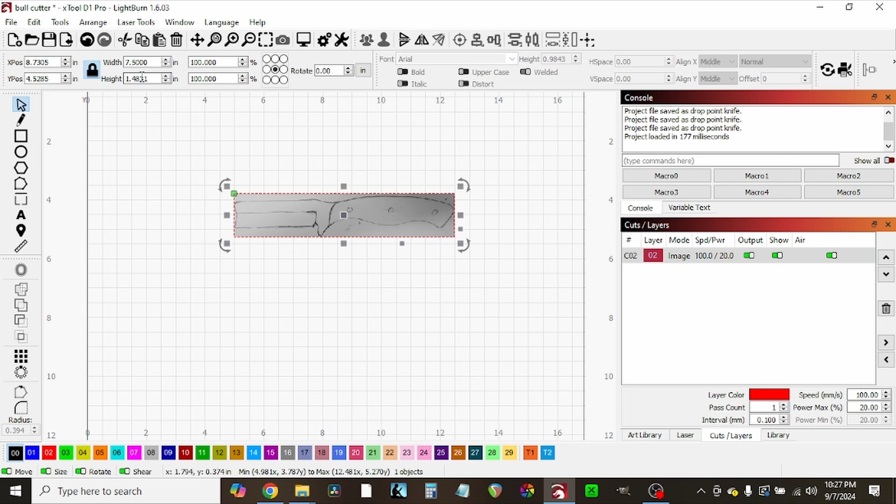Another tip, when you're cropping, crop it as close to the design as you can. Then you can set your size and get it close, and we'll get it perfect after we get the design outlined.

Now, in order to outline it, you use the pencil tool. Zoom in.

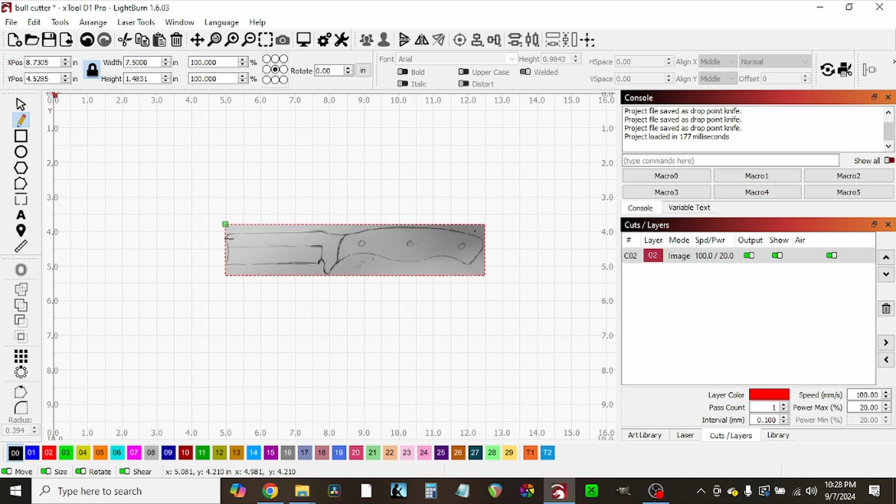I've got it set to red so I can see it better. Now you can see I got it cropped pretty close.

I'm going to start right here on this curve. I thought I had it set to red. Alright, now it's set to red.

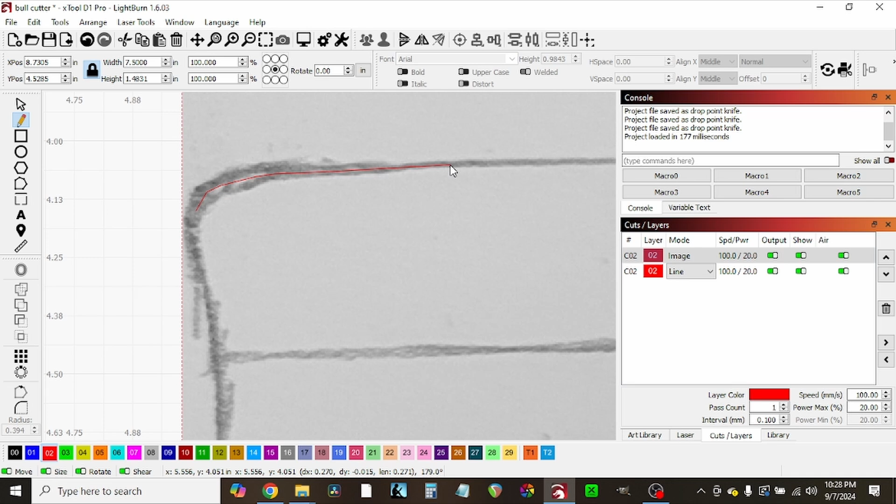I'm going to just make short lines around this curve, and as the lines get straighter on the design, we can make longer lines.

Also, if you're having trouble with it snapping to the grid, you can go to settings and turn snap to grid off. That's what I did.

So you can get precise on your design, is what I'm trying to say.

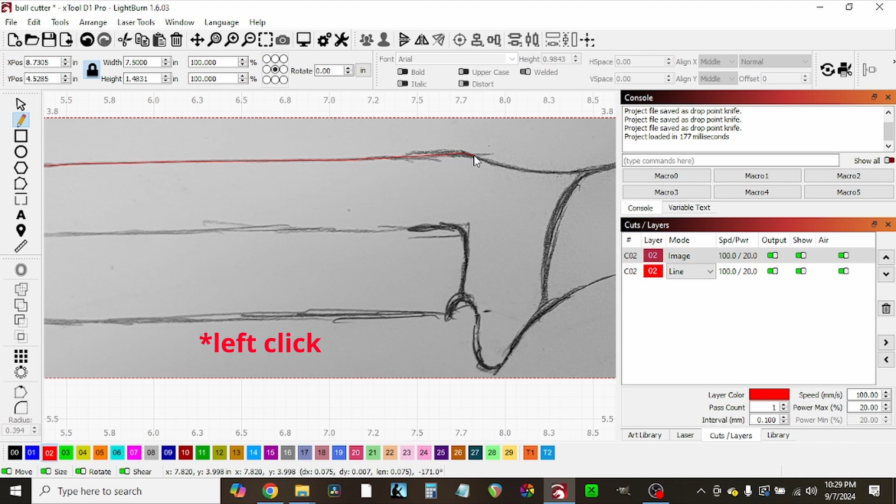So we come to a curve, and we're going to make short lines. All I'm doing is left clicking, then moving my mouse and going a little further. Now if you get a little off, it's okay.

I'm using the wheel button to move my picture around. Just keep trucking along, and this doesn't take very long to do.

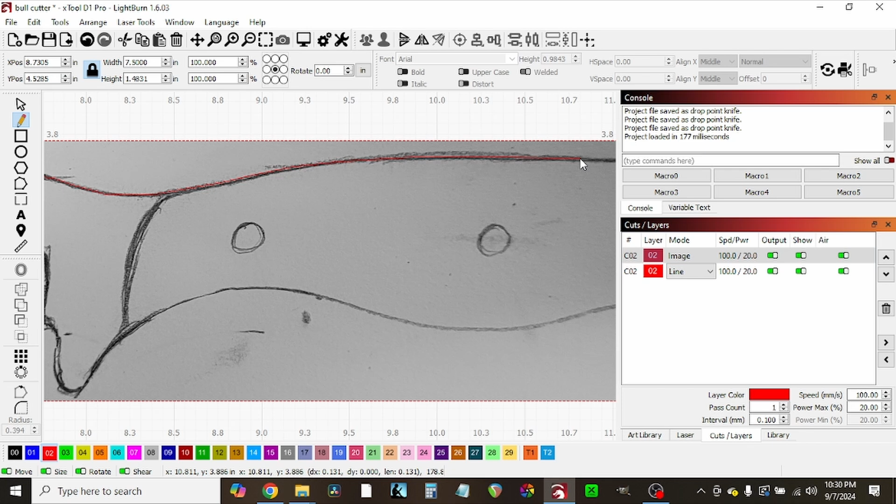There's a few curves in this one. Getting closer, too close.

Now this is not going to be... screwed up. Almost. I used the wrong button trying to move the picture.

Now just keep trucking along to get all the way around it. I may speed this up, I don't know. Maybe not, because it doesn't take very long.

Now, if you goof up and get one like this, we can fix that later. I'll show you how to do that when we get done with this trace.

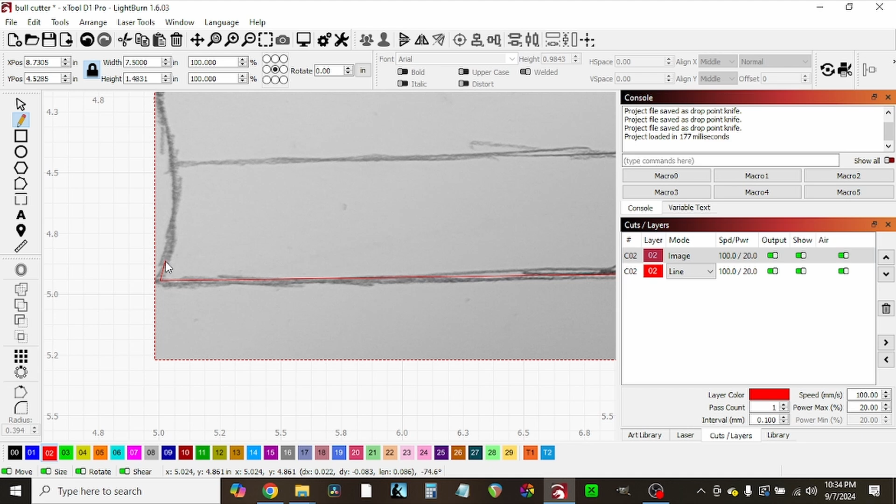It'll be straight all the way over to here, and this is going to have a little bit of roundness to it.

We'll fine tune that on the sander as well, because it's hard to get a curve on this line. I mean, it can be done, but...

Almost to the finish line. This part, anyway.

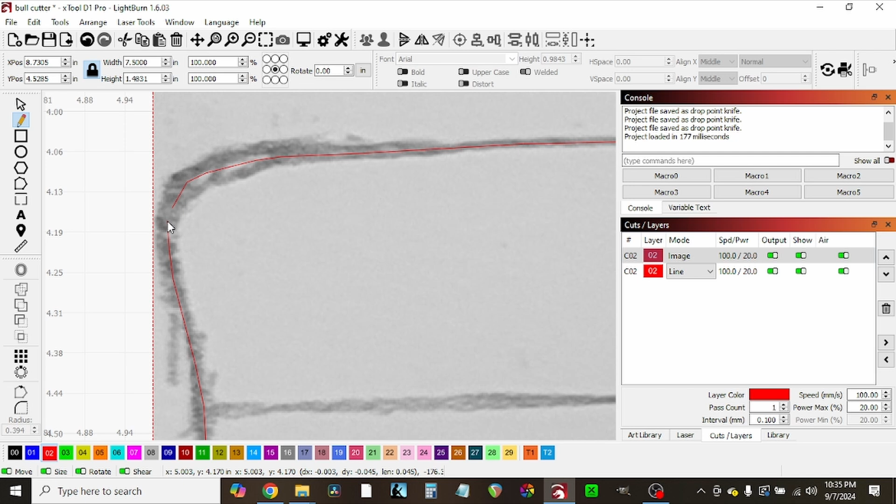Now when you get to your line, zoom in real close and connect these two lines. There.

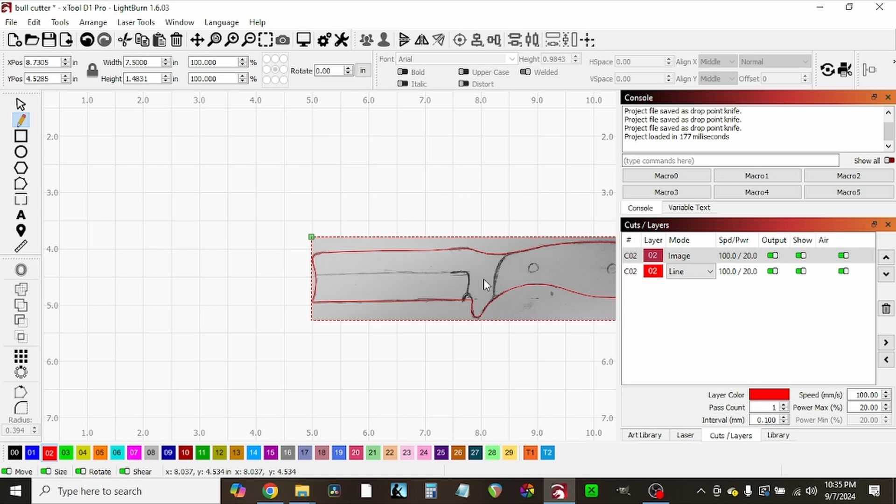So now we've got a trace all the way around it. And where was that oopsie spot? Right there. So to fix that oopsie spot, go up here to edit nodes and click on that.

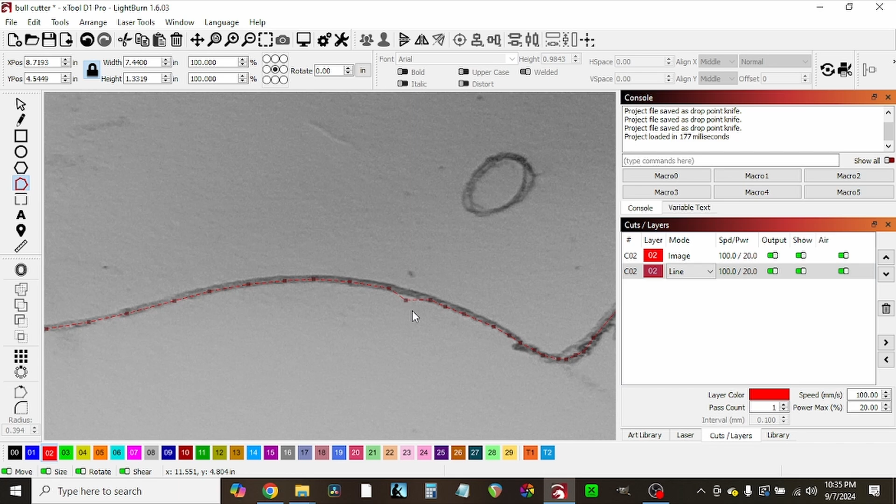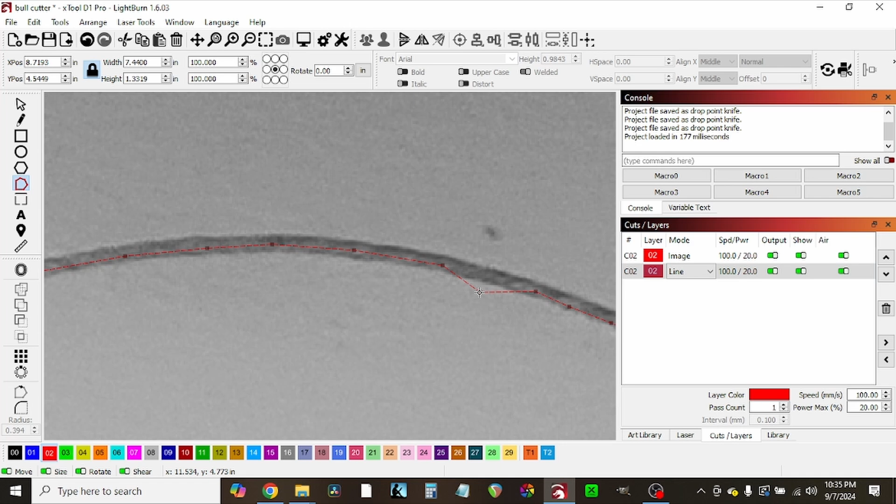Click on the line, and here's all your nodes—there's a bunch of them. So we can fine tune this and fix that little spot right there by dragging it back up into place.

There, it's fixed. Now if there's any other places, like maybe that one—not bad—bring this in just a little bit.

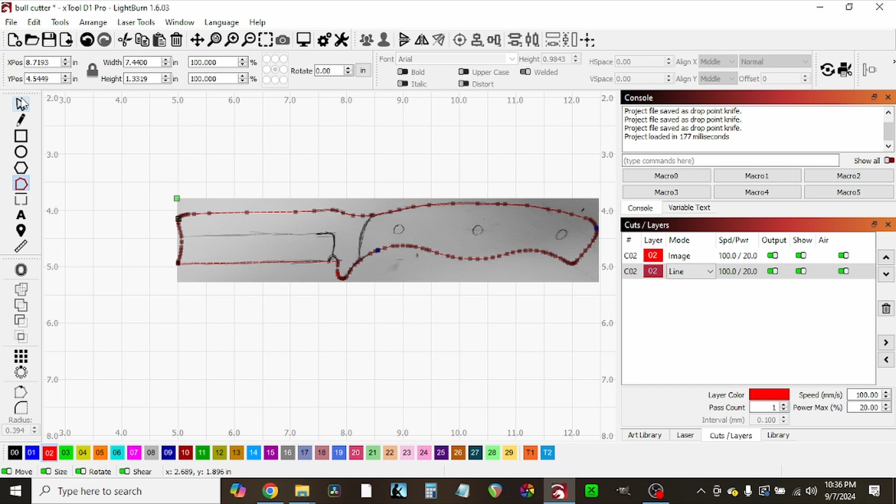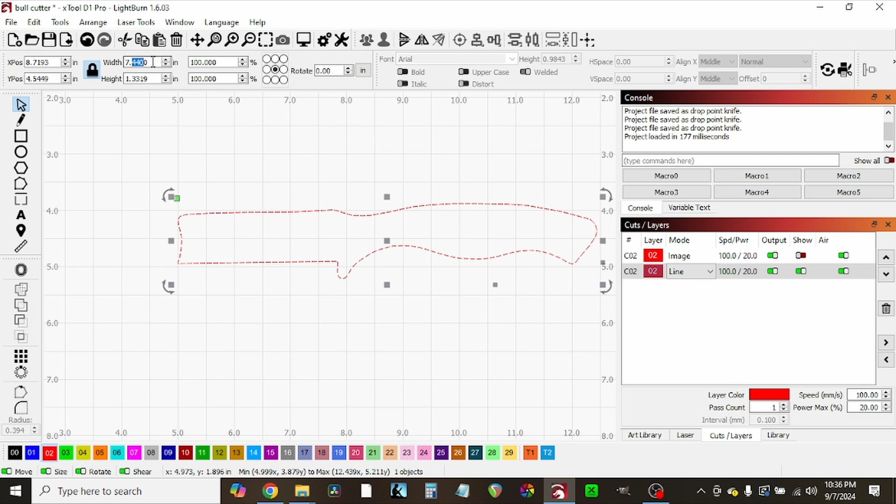That looks good. So I'm going to go to my selector tool and select. First I'm going to turn this off, and this is selected. It's 7.44, but we started out with 7.5 on the picture. I want it 7.5, so I'm just going to highlight that and put a 5 there. Now we have the right size.

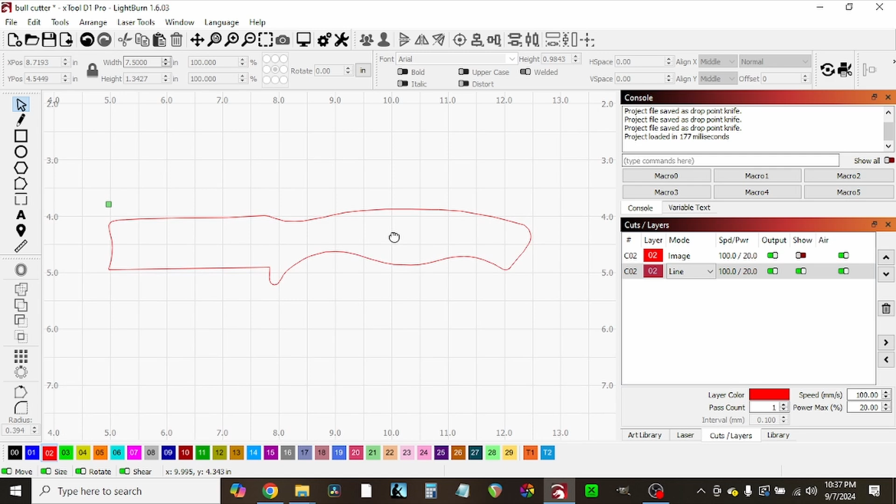Next is the pin holes for your pin stock. Or no, probably ought to do this line right here, edge of the scale.

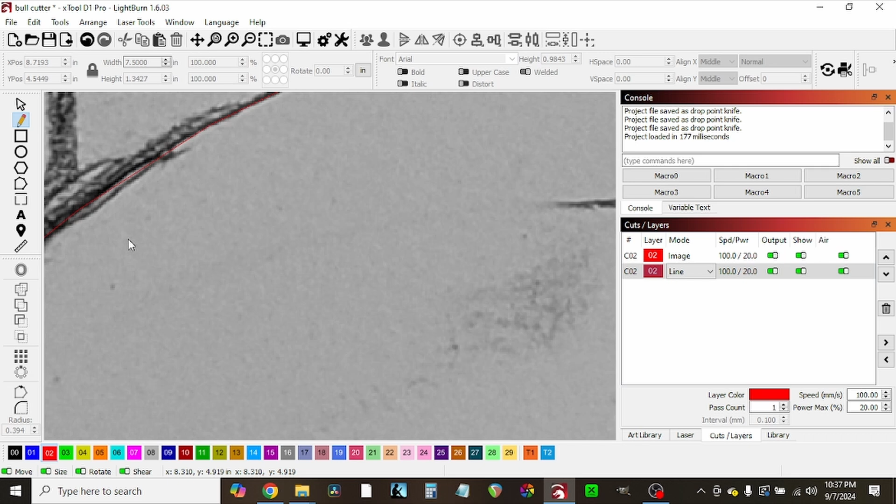So we'll go back up to our pencil, zoom in. I'm going to do this in blue, because I don't want to cut this, I just want a line right there. We'll follow this up. Again, it doesn't have to be perfect, it's just a guide.

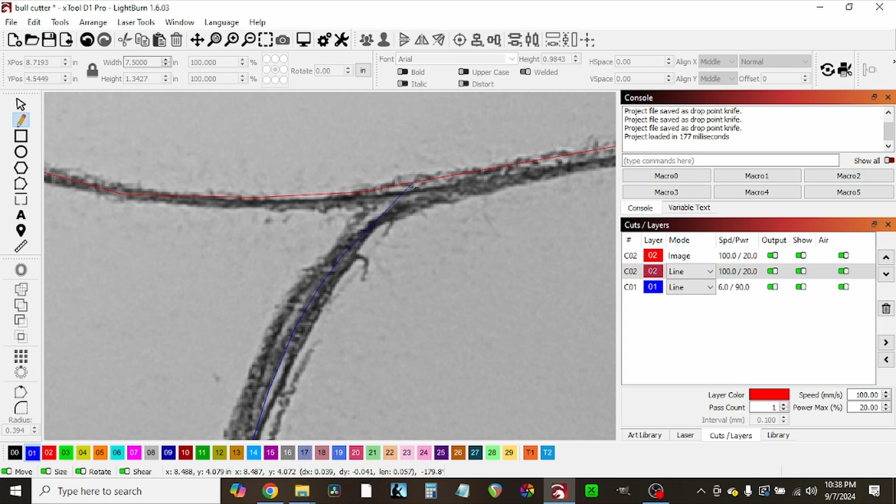Now, up here, get as close to that line as you can, then right click to stop. So what we've got now—I'm starting to get into a hurry because it's night, it's late, and I'm tired.

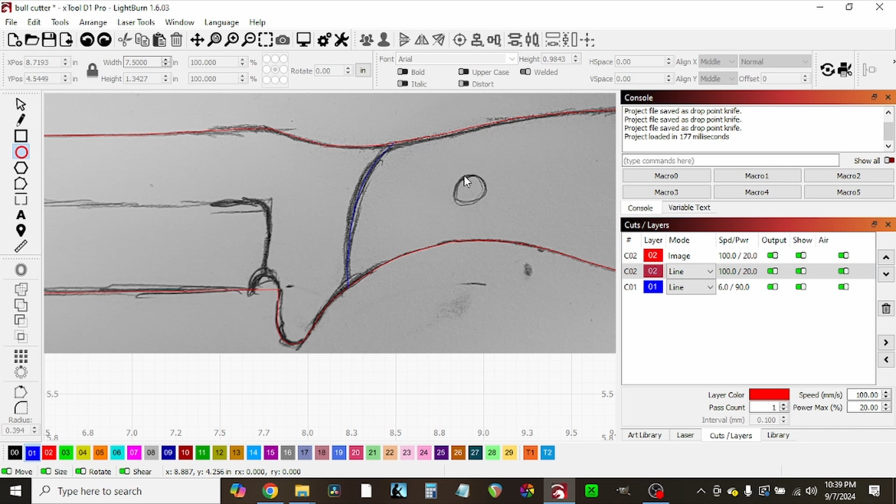So next is the holes for the pins. I want to put them on here because it's easier to mark them—I don't have to mark them separately. We'll hold down shift, then left click and drag, and that'll give me a perfect circle.

That's pretty close to the size I want. I'm going to come up here, make sure circle is selected. Come up here, and I want to put the size of my pin stock. I'm using 3/16, so that's 0.187.

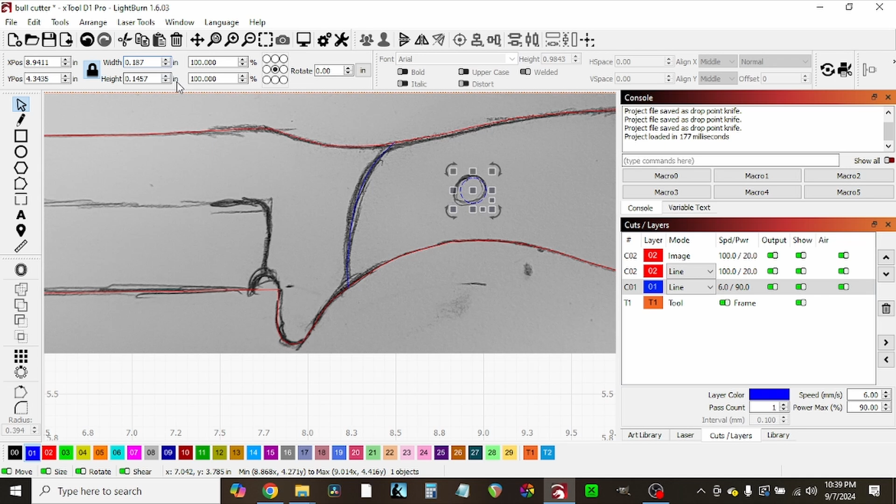This is locked, so this will change here. What the hell happened? 187. Okay.

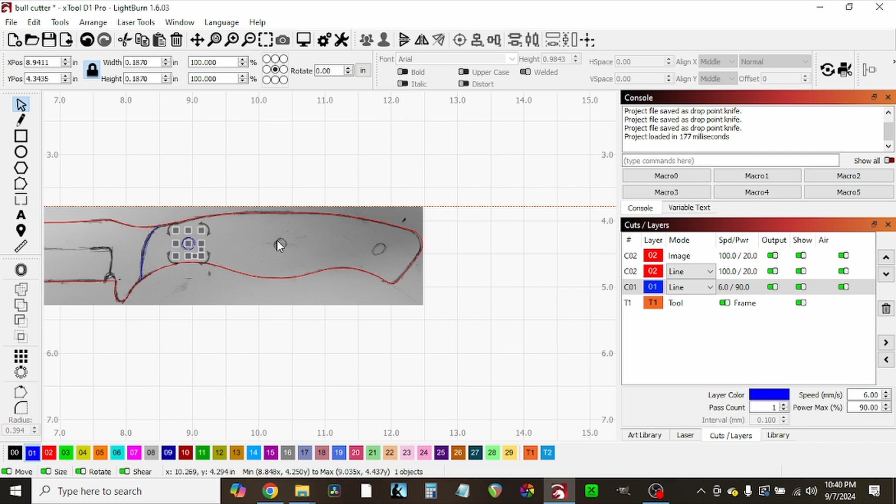Now the first one's marked. We're going to right click, copy, over here where we want it, paste, then another paste over here. And now we've approximately got our holes.

We'll turn that background picture off. Now I'm going to place this where it looks good—right there. This needs to come over—right there.

Now I'm going to measure from this hole to this hole—1.3198. 1.2.

So let me come over here. I'll turn this off—sucks, I have to turn it off to move this over just a fraction of an inch.

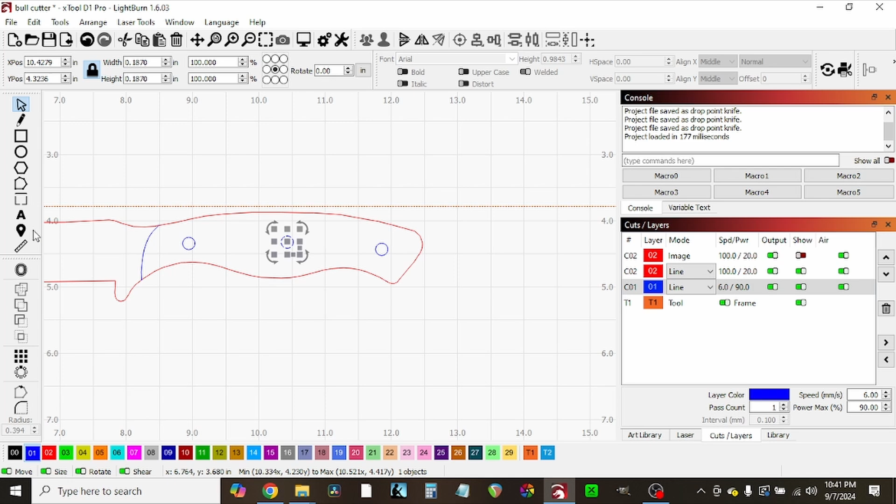Now I'll go back to my measuring tool. Measure—1.3, 1.24—and move it over a little bit more. No, I'm not going to get it perfect. I'm going to get close. Try that.

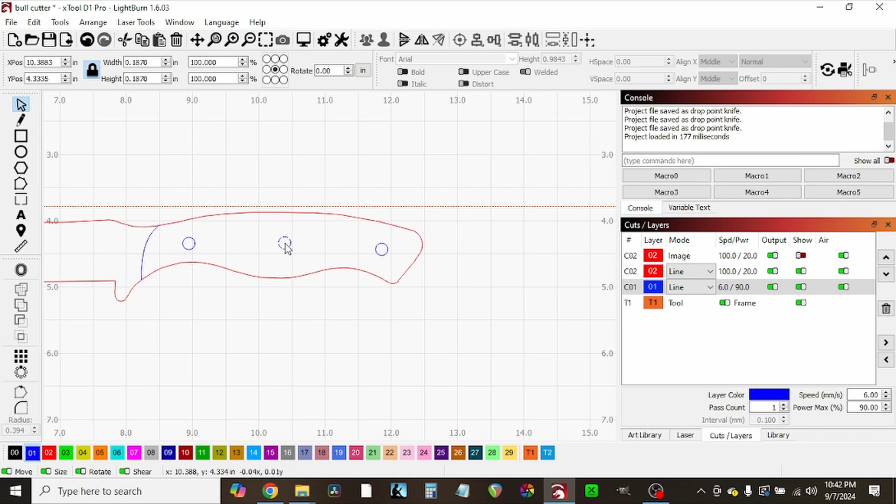This part's a little finicky, but well worth doing. I think I moved it too far—it's 1.26. 1.28, okay, that's close enough. And it looks like it's pretty close to centered, up and down, left and right.

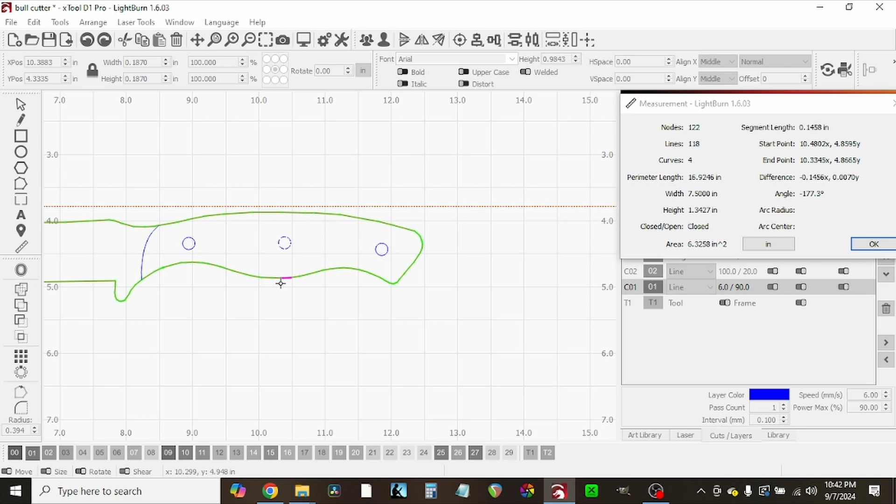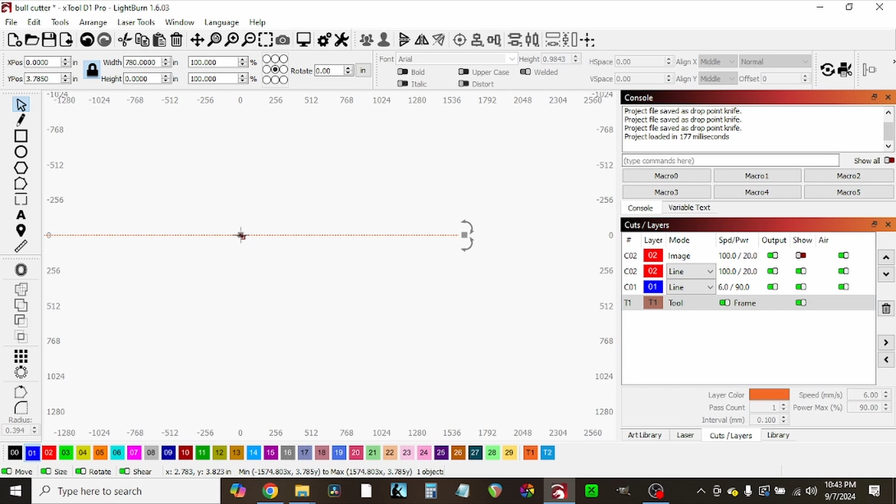Now the next thing I'm going to do—close that, unselect that. Where's that line? What the hell is that line? I didn't put that line there. Huh. No idea—get rid of it though. I don't need it, no idea how it got there.

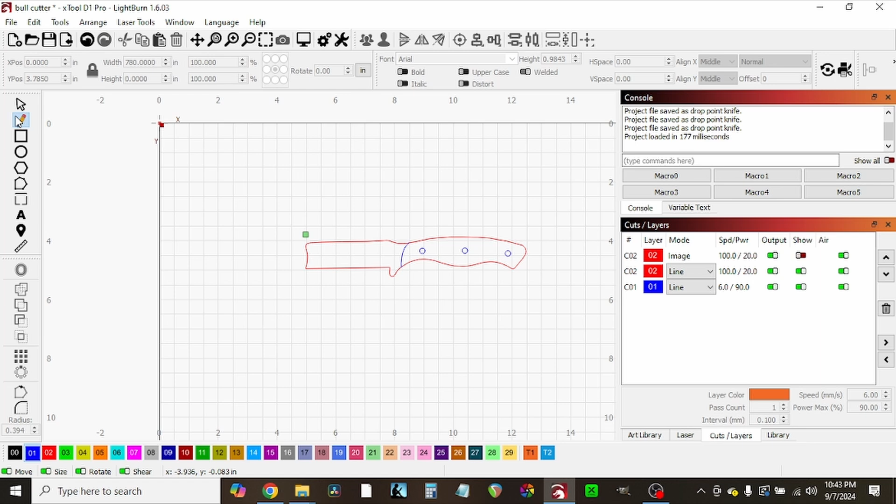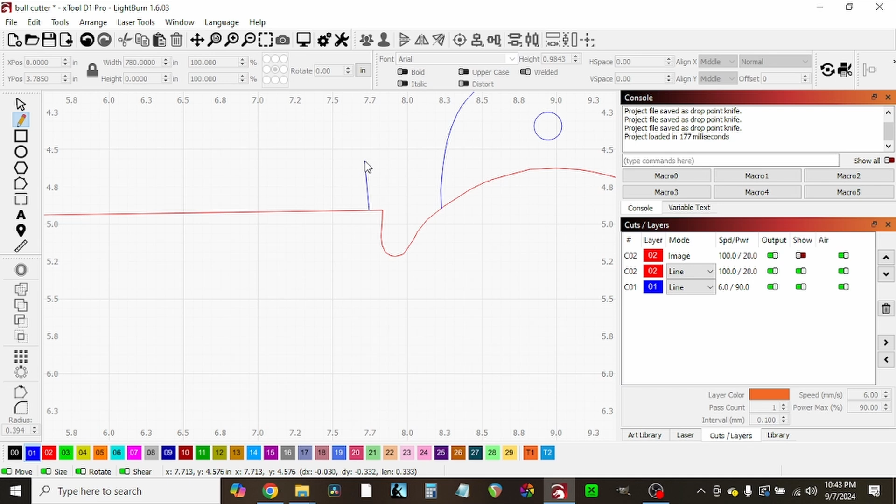Okay, the next thing I'm going to do is take my pencil tool. I'm going to come over here, and my sharpening tool will be centered probably about right there. Cancel that—right about there. Zoom out. Probably bring my grind line up to about right there.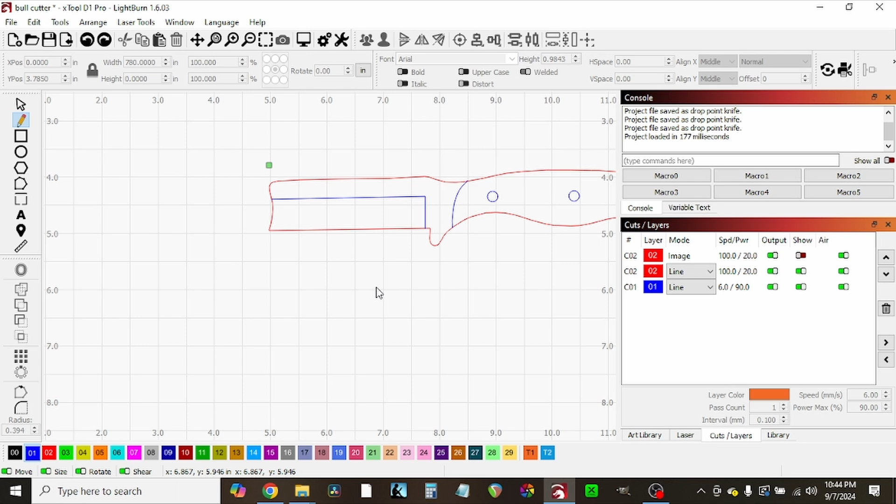So that's about what it's going to look like. Now let's see, just looked it over, make sure I'm done. And we can show this image.

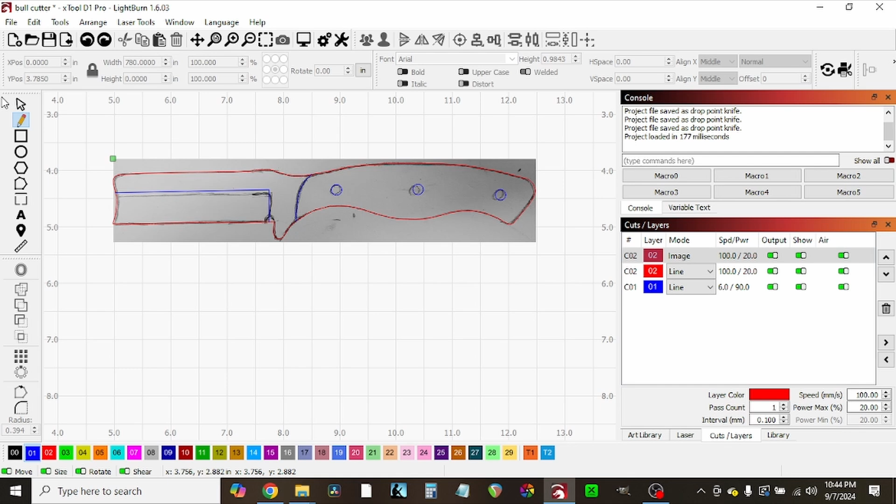Click on it. Cancel. Now we click on it and delete—don't need it anymore.

Now this needs to be set for 1/8 inch. I've got an xTool 10-watt laser, and the speed is right. I need to turn up the heat on this one. No, that's not right—that needs to be 6. This needs to be 90. I think I'm going to turn that to 5, because my lens is pretty dirty on it. One pass. Okay.

Now on this one—come on, select it, select it. This one I want 100 speed. And I want about 70. Oops. One pass.

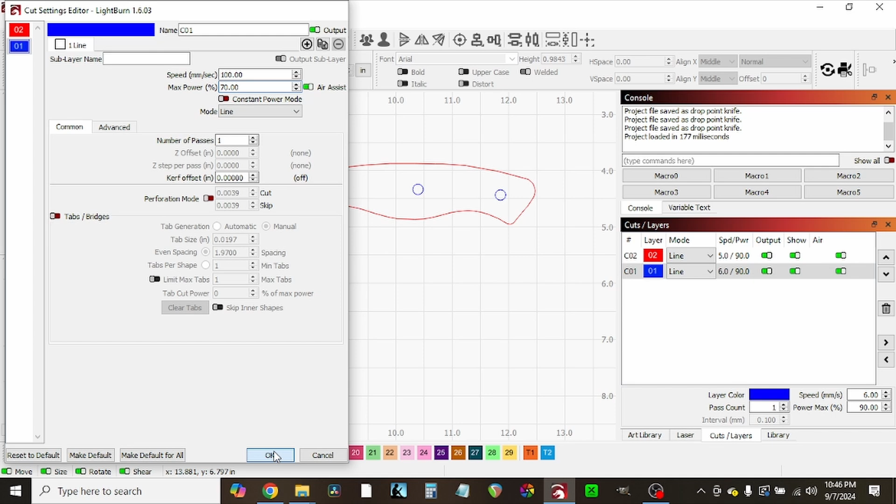And I just noticed these are blue—I don't want them blue. So I'm going to hold down Control, select, and select all three of them, and put them on this red because I want them cut out. The blue lines I don't want cut—they're just marks, guidelines.

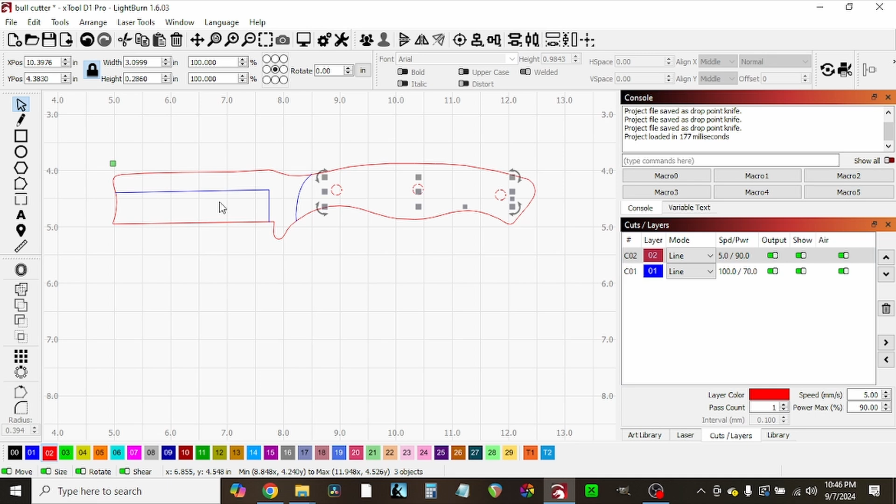And now we are ready to burn. So I think I'm going to finish this up in the morning. I'll do the video in the morning, and I'll post all this together, of course. So I'll be right back.

Oh, and don't forget to save your work. Never forget to save your work, like I did, because I could have screwed up royally and then I'd have to start all over again.

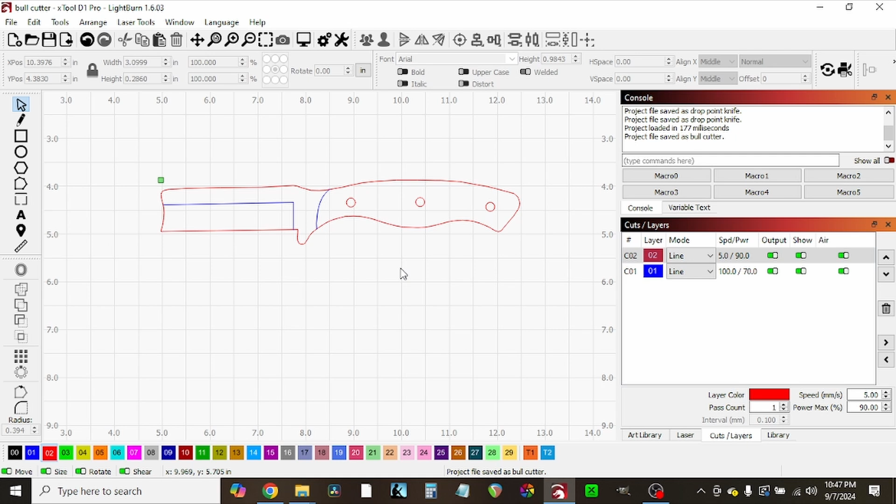So this looks good, as far as I can tell. Make sure we're still at 7.5—we're at 7.5 inches. 187, 187, 187. Okay, well, this is ready to burn, and I'm going to do it in the morning because I am tired. I'll be right back.

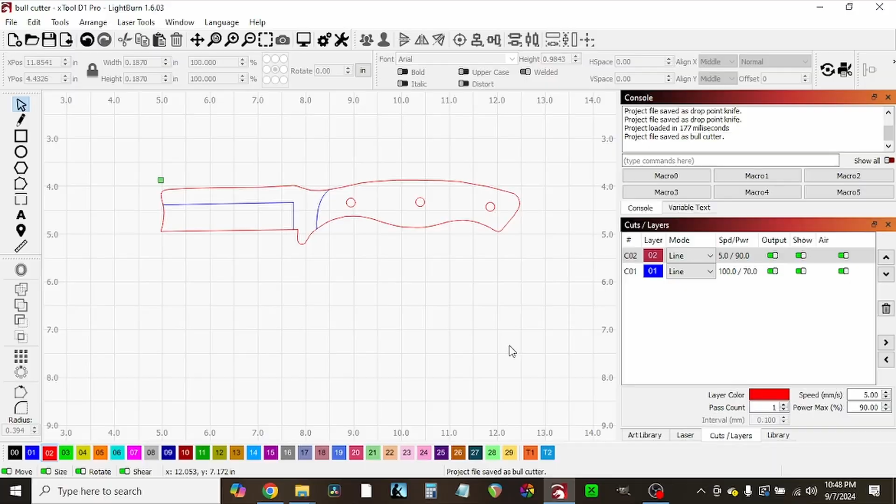Alright, it is the next day, and we are going to cut this knife out. I've already got my laptop set up right here. Got the laser turned on. Got to set the height. Alright, height set.

Dust on the rail. Alright, set it up about right there. Now I'm going to hit frame, make sure it's in frame. Yeah. I want to plug my air assist in. And we're going to burn.